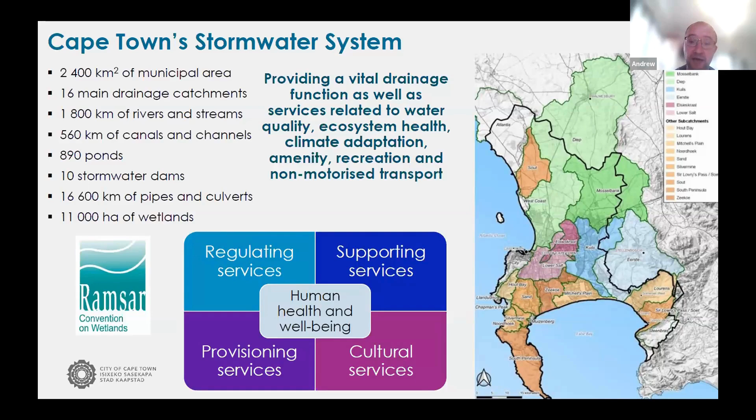But we have challenges, like all urban areas in South Africa and in Africa and perhaps even globally. Cities and towns are struggling with various issues when it comes to catchments, rivers, and stormwater. In particular is the devastating impacts of a changing climate. So we are very much at the forefront of the impacts of climate change, unpredictable rainfall, and more intense storms, shifting of weather patterns causes flooding.

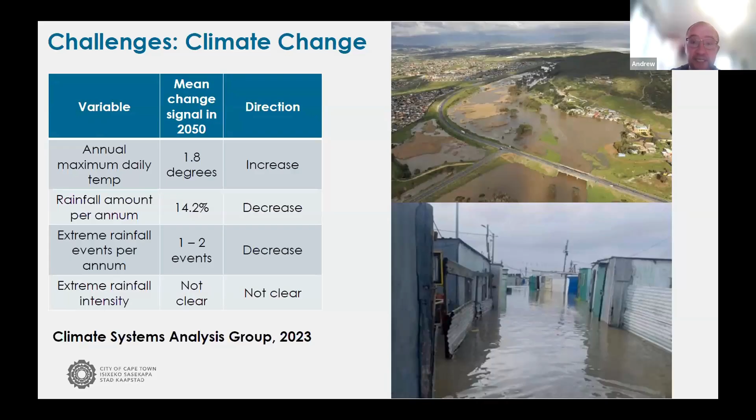Cape Town is typically quite a flat city, very high water table, quite sandy, which means that communities can get quite wet even with minor storms. And unfortunately, it's usually the most vulnerable communities who are impacted the most. So climate change and in particular flooding is a very big challenge for us here in Cape Town.

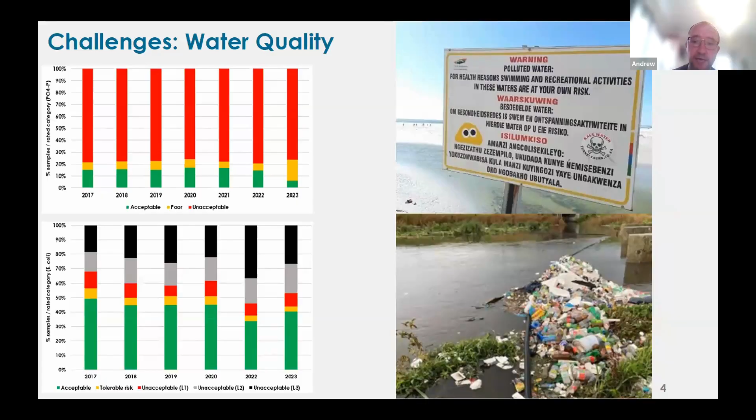Many of our waterways are suffering from pollution, from litter, dumping, sewage contamination, a range of other contaminants from land uses, industry, and many of our waterways are in a really poor condition with regards to water quality. And again, that puts a significant risk on water users and on communities that rely on the water or who live next to these contaminated water bodies. And we have a long way to go to start to turn the situation around.

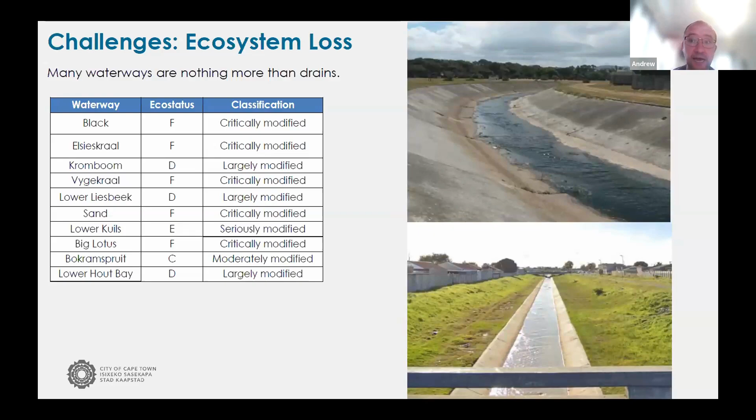Cape Town is actually one of the most biodiverse cities in the world. And our biodiversity is an incredibly important part of our city's urban fabric. But we are struggling with biodiversity loss. Many of our waterways have been converted into drains, canals, and channels, effectively ending the natural river function. And the pressures to develop in our city are increasing, and that puts additional pressure on our environmental assets and particularly on the ecosystems around our waterways. So that was just a quick summary of some of our challenges.

Yeah, thank you. I think this is kind of reflective of many of the towns and cities across South Africa and the continent, and as I said, globally, rivers, particularly in our cities and towns, are typically in a poor state. And there's a lot of work for us collectively as authorities, but also as civil society and private sector, to do to try and turn the state of those around.

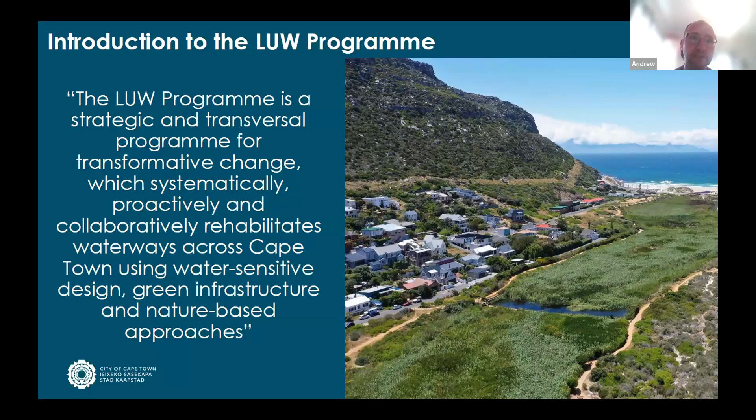And effectively, what it's about, it's a program for change, recognizing that the status quo is not sustainable, and we need to make some fundamental changes, which is looking to, at its very heart, systematically, proactively, and collaboratively rehabilitate the city's rivers and wetlands, but with a particular focus on using water-sensitive design approaches, green infrastructure, and nature-based solutions.

Right at the beginning, we realized that to effect transformative change, we needed to tackle this from 3 fronts. And we developed a scaling strategy that would look at 3 particular elements. One is to scale on the policy side, to make the shifts and the adjustments in the policy agenda. One was to look at projects on the ground to actually develop and implement rehabilitation and climate adaptation projects in the catchments and in the waterways.

And then thirdly, it was bringing people along, collaborating, partnering, and working with communities and other stakeholders so that they are part of the process. And all of our work generally in the last couple of years has been able to talk to one or more of these scaling fronts. All of this is documented and laid out in our implementation framework, which has just, at the beginning of this year, gone through a revision, which is effectively our blueprint for how the program is unfolding. And in the implementation framework, we have our 5 work streams. And my role as the program lead is to kind of coordinate across all 5 of these work streams.

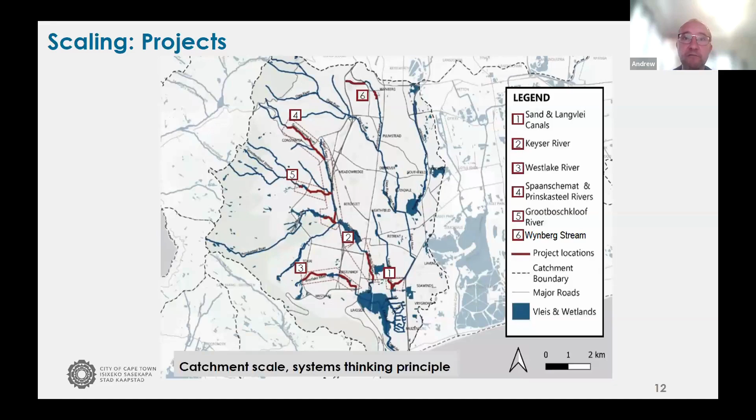And we decided that to fix the health of the catchment and the health of Zandvlei, one would need to take a strategic approach across many of the river systems and their tributaries in the catchment. So we packaged our first batch of projects in that way, so that we can demonstrate catchment scale thinking, systems thinking, and hopefully get cumulative benefit from a number of interventions in a catchment system. So we've done a lot of work to develop these projects.

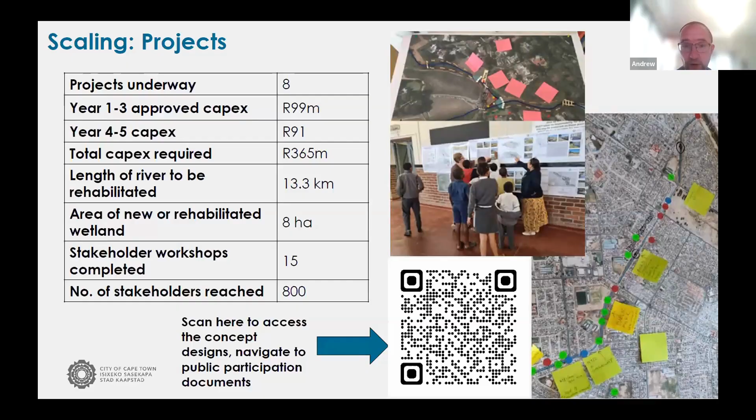As I said, we have 6 in the Sand River catchment and a further 2 in another catchment, so 8 in total. We've managed to mobilize nearly 200 million rand of committed budget, which the municipality is financing. When we finish these 8 projects, we would have rehabilitated over 13 kilometers of river, and rehabilitated or created about 8 hectares of new wetland. And we've done this in collaboration with stakeholders. We've had a number of stakeholder meetings, workshops, co-design engagements, and to date we've reached well over 800 stakeholders just for these 8 projects.

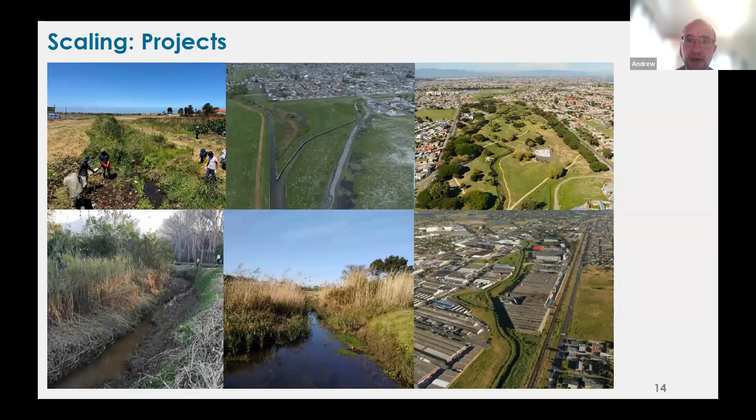And this is just a screenshot of some of the project spaces. I won't go into the detail for all of them, but effectively the projects are rehabilitating the river corridors, removing invasive plants, fixing erosion, opening up the river, re-meandering it, widening it, putting in floodplain wetlands, and importantly, putting in social infrastructure around the wetland and river spaces so that people can link with the waterway and can connect with the waterway in a positive way.

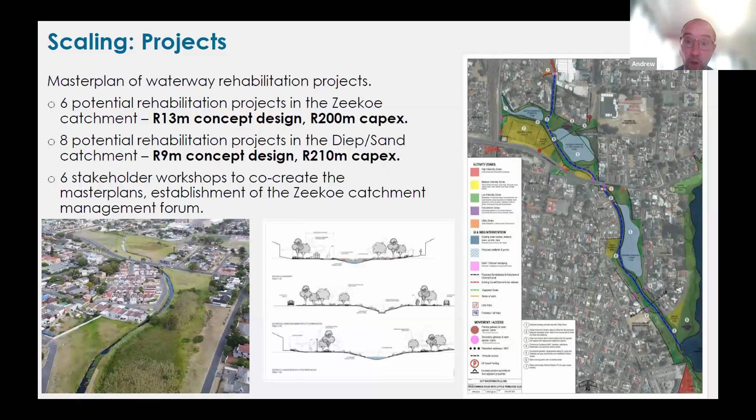We've done a lot of work to try and build our long-term project portfolio, so we can build on the 8 projects we have currently underway, and through some support from the C40 City Finance Facility, we've managed to develop a master plan of projects in a number of other catchments, quantifying the financing and the budgeting that we need, coming up with some early stage concept designs, so that we are starting to prepare ourselves for developing a longer term portfolio of projects.

At the heart of what we're trying to do is design with nature. We've over-engineered our stormwater systems, and we need to move away from that if we want to build resilience and sustainability into our catchments. And no more is this shown than the South Langevlei project, which has got money approved for implementation next year. Here we're going to actually knock down 2 canals, just over half a kilometer of canal will be removed, and we will put in a natural river. We're going to renaturalize the stream like it was before the canals were put in the early 1950s.

We're going to create about 8,500 square meters of new wetland. We're going to plant over 100,000 new plants, all of them locally indigenous. We're going to daylight stormwater pipes. We're going to put in seating, benches, lighting, signage, walkways, better litter and silt management facilities, effectively repurpose this whole space to create a nature-based solution that can provide not only environmental benefits, but also socio-economic benefits as well.

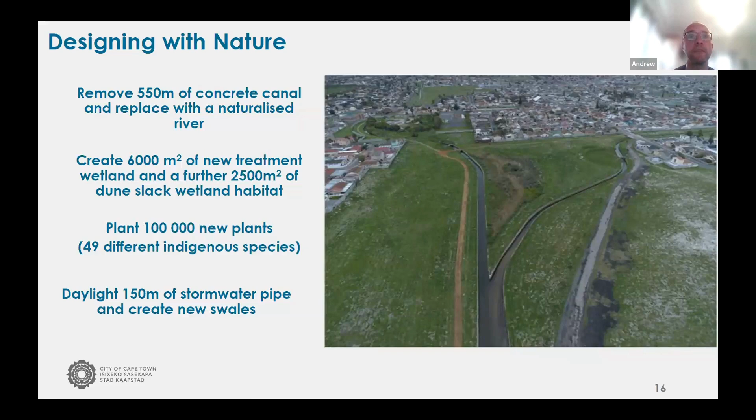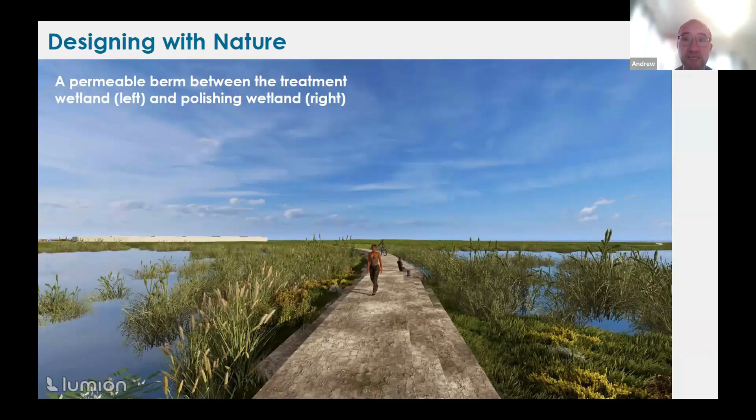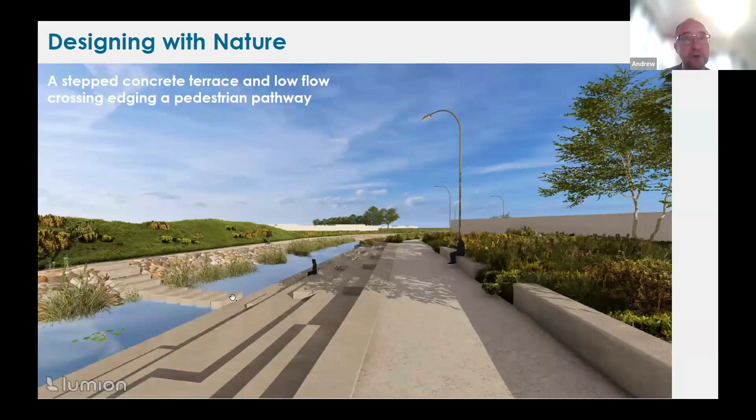And here are a couple of architect renderings of what the space might look like. If you ever do come to Cape Town and you manage to see the space now, the vision for the space is very different. It's going to be a completely redesigned and constructed wetland system. We're going to be taking down the canals and opening it up into a natural river system where we can, as well as putting in, as I said, much needed seating and lighting and spaces for the communities to interact with the water.

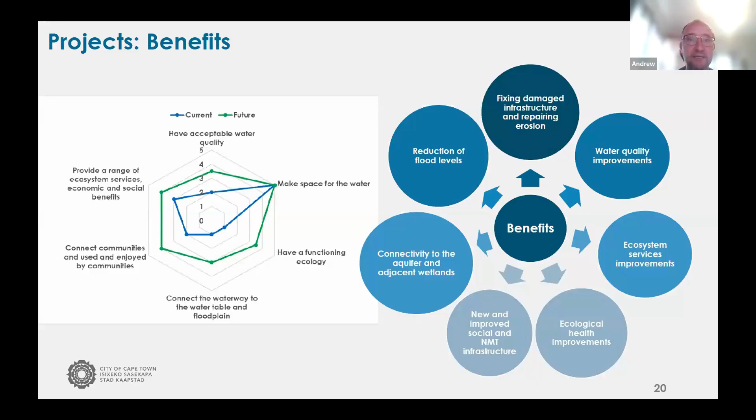We've done a lot to try and quantify benefits of this work. Again, this is part of the advocacy, building a case. And we've obviously aligned all of this work to our program's monitoring and evaluation framework, so that we are doing this in a structured way that can be replicated across all of our projects as the program rolls out. And in particular, we've worked quite closely recently through the C40 CFF with the International Institute for Sustainable Development to put a financial case together, actually quantifying benefits in financial terms. And we're using this as a tool to motivate and mobilize resources for the rollout of the work.

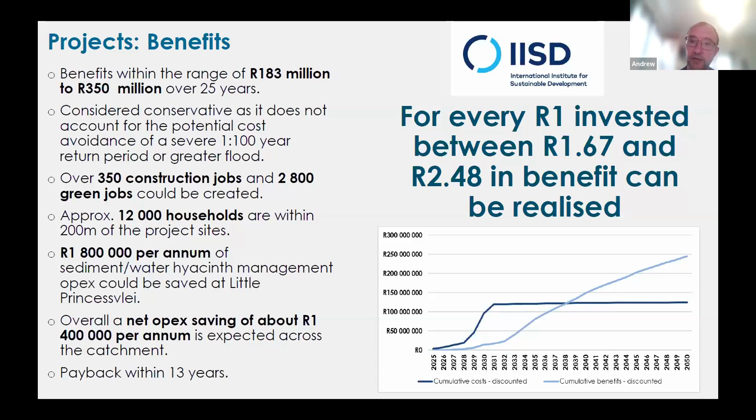And the headline figure for us really is that for every R1 we can invest in our waterway rehabilitation projects, we could get up to R2.50 of return, which is both direct benefit to the municipality, but also indirect benefit for society and the economy.

Right, next poll, please. Andrew, before we move to the next poll, there are a couple of questions in the chat. Do you want to address them now? Yeah, please go for it. Sure. Do you want me to? So I can't see the chat, so you're going to have to read them. I can read them for you.

Thank you. From Paika, there is a question around did the city take into account South Africa's national adaptation plan in implementing your project? Is it aligned with national level climate planning? Yeah, so absolutely.

So what we do at a city level is very much aligned upwards to what we do provincially. So within the Western Cape province, we also have a water strategy and a biodiversity strategy and a climate change strategy. And that itself aligns to the national strategies on things like climate adaptation, biodiversity, and the like. So we're very much aligned, and we will be very locally contributing to the national agenda.

Wonderful. And speaking of those strategies, you mentioned that the Liveable Urban Waterways project is embedded within them and also within the IDP. How did you manage that? That was a question we have from Tinka. So that was really right at the beginning of the program. Before it was even a program, it was still just an idea. The advocacy, the influencing, and the lobbying started.

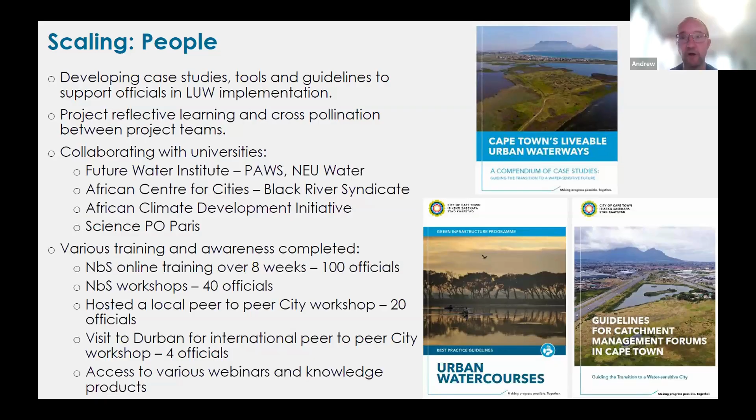And we've also collaborated quite extensively with research organizations, in particular the University of Cape Town, the Future Water Institute, the African Centre for Cities, and the African Climate Development Initiative. And recently, Sciences Po University in Paris was out here doing some exciting research, and we partnered with them. And we're always looking for partnerships with research institutions to help further the objectives of our program. So it's very much around the people side, bringing them on board and keeping them involved.

So I've actually got a video. Hopefully this works. I'm going to have to stop sharing this. Hold on a second.

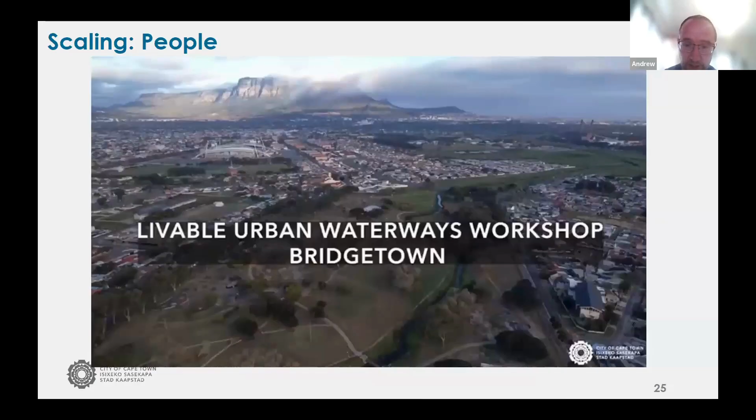And I'm going to share a quick video just to give you a flavor for what we've been doing in our co-design workshops. So for each project, we've held a co-design workshop where we've engaged with the communities and brought them on board to help co-design what they want out of the river rehabilitation project, drawing on their knowledge, their experiences, and where possible, utilizing the feedback from these sessions to inform the actual design.

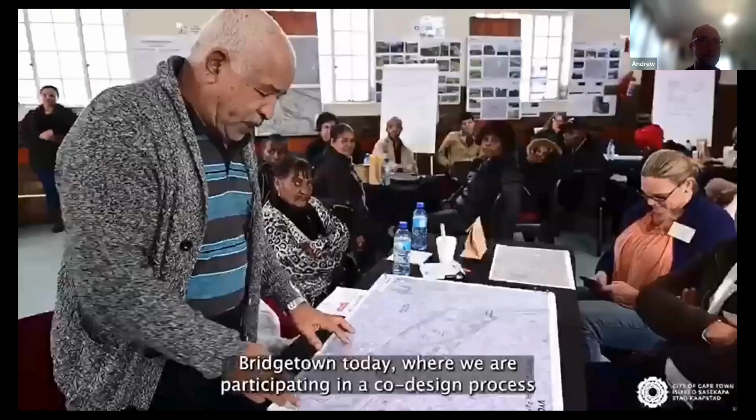We are in Bridgetown today, where we are participating in a co-design process with our community members, looking at how we can improve our river infrastructure here in the Athlone area, our green infrastructure, but making sure that our residents, as you can see behind me, are part of the process and are the ones who actually decide what is happening in their particular area. So I'm so grateful to our teams who are driving our Liveable Urban Waterways Program within the city, and to all the teams and the members that have made today possible as well.

So the workshop has been very, very informative. It's also a great experience for me, as it's the first time I'm experiencing this workshop. So yeah, let's hope that we could put our vision into a reality.

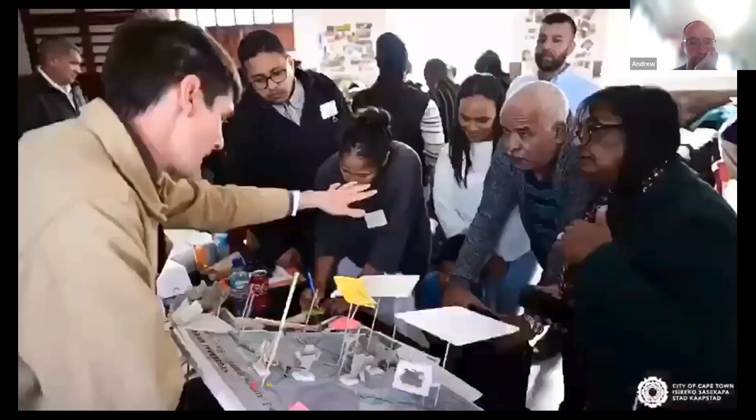Yeah, so that just gave you a very brief snippet of the engagements we've had. As I said, we've had about 5 of these co-design workshops now for our 8 projects. We have another one planned early next year. And as more and more projects come online, we will continue to roll out more co-design workshops to really provide an opportunity for communities to participate in the design of the space as we take projects forward.

The cost benefit report done by the International Institute for Sustainable Development is available online. It's actually on the IISD website, and provides a really good background to how we approach the cost-benefit study and some of the findings.